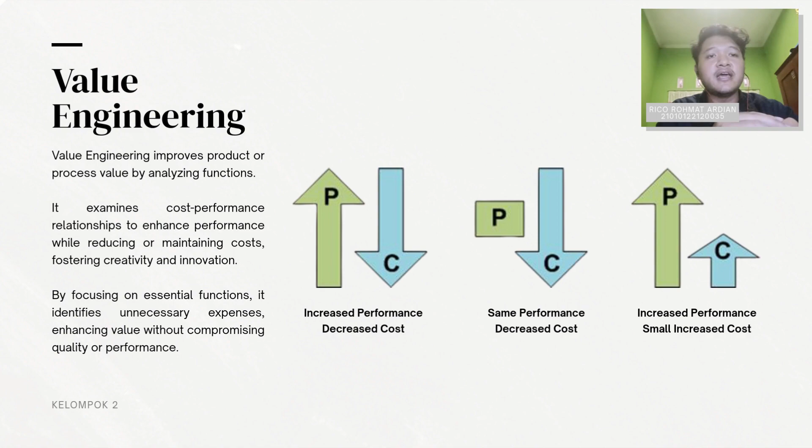Moving on, I will explain about the main stakeholder of the project. CREATE, or Chicago Region Environmental and Transportation Efficiency, is a public-private partnership program where the federal or state government is partnering with private companies in Chicago, focused on improving the region's rail infrastructure through a series of interrelated projects.

Its goal is to reduce traffic congestion, increase efficiency for both freight and passenger trains, and strengthen the national supply chain. The program involves 70 projects to separate rail lines, eliminate conflicts between railway and roadway, and increase speeds for both trains and vehicles.

As can be seen in the picture in the presentation, this is a short portfolio of the CREATE program. The CREATE program is investing in the Chicago region's rail network to add capacity for all transportation, reduce travel times for both trains and vehicles, and improve safety for both of them too. More than 70 projects across the Chicago region have been built or are still being constructed today.

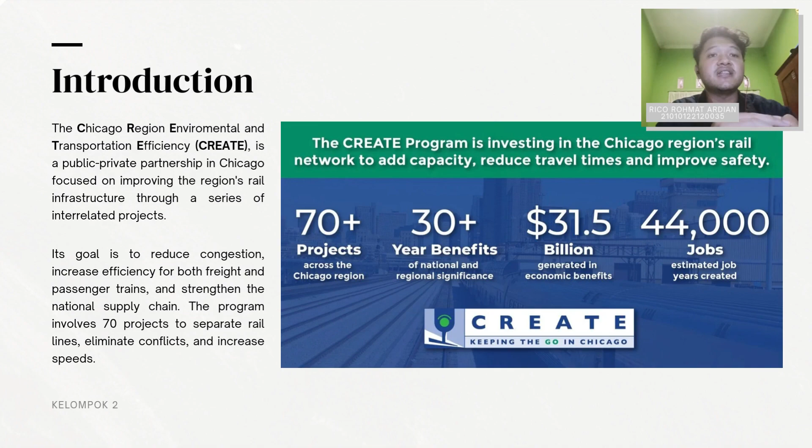Now I will explain the context of this project. In the presentation above, you can see 25th Avenue highlighted in red. That is a crucial 4-lane roadway with an existing average daily traffic, or ADT, of 19,000, projected to reach 20,000 by 2040. It serves as the municipal boundary and is under Bellwood's jurisdiction, providing vital access to Interstate I-290. The interstate is located in the far north of the map.

And the blue highlighted one is the Union Pacific Railroad, or UP, facility. That is a, apologies, rail tracks which cross 25th Avenue at grade, or in other words, at the same elevation. The Union Pacific Proviso Yard, or simply put, the train station, is located approximately 790 feet west of the crossing.

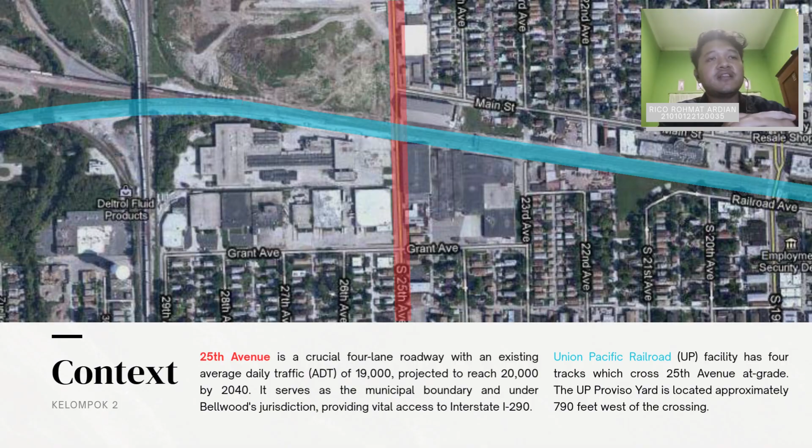Moving on, I will explain why and what the project aim is. The 25th Avenue and Union Pacific Grade Separation number 6 aims to create a grade separation that differentiates the elevation between 25th Avenue and the Union Pacific Railroad. This project is sponsored by Melrose Park, Bellwood, Maywood, and the federal government.

The need for the proposed improvement is to address operations and safety along 25th Avenue, the crossing safety between the roadway and railway, and reduce delays mostly caused by passing trains. The value engineering study occurred in the early phase when plans were approximately 30% complete. This means that the design team can change many things that can positively affect the project, and there are also many possibilities for collaboration between the stakeholders.

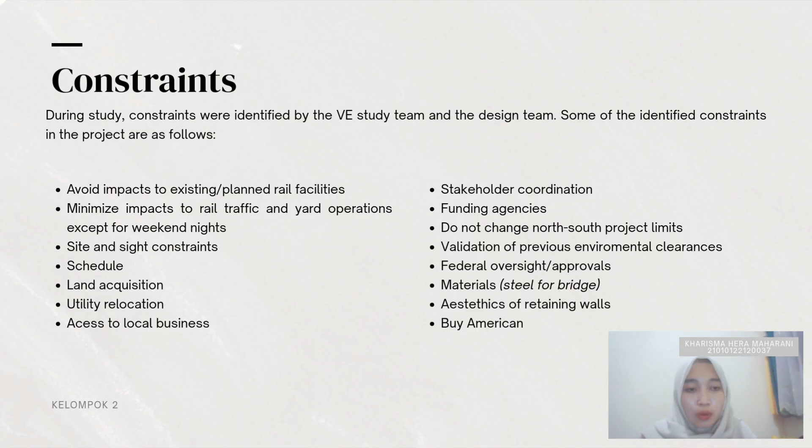There are also limitations related to the site condition, schedule, land acquisition, utility relocation, and access to local business. In addition, the project must consider coordination with stakeholders, requirements from the funding agency, and maintaining the established North-South project limits. Environmental document validation, federal approval, availability of materials such as steel, and the aesthetic of the retaining wall are also important considerations.

Each risk has a different level of impact and likelihood, so it is important to prepare strategies to manage them. By understanding risk early, the team can make better decisions and ensure the project stays on track.

And then project position. During the value engineering study conducted by the firm, users, owners, and stakeholders of the project are reviewed in accordance with the environmental document and contain a clear definition of each type. A user is defined as one who physically uses the project and maintains the project. An owner is defined as the one that is responsible for financing the project, managing the project, and representing their interests. And then a stakeholder is anyone who is financially affected by the project, a change in habits, or a change toward the environment.

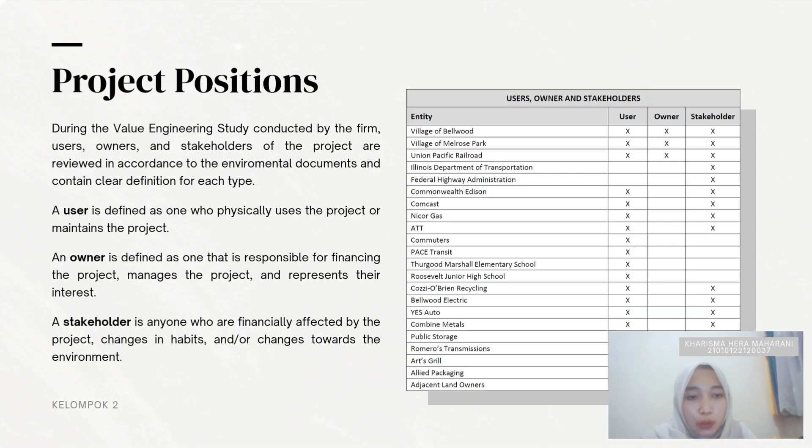In this slide, we discuss the project position, which categorizes the parties involved in the project as users, owners, and stakeholders. Users are the people who use or maintain the project, such as the public who will pass through the area. Owners are the parties responsible for funding and managing the project. Stakeholders are the parties affected financially or by the change in habits or the environment as a result of the project. The diagram in the slide shows who belongs to each category. By understanding each group's position, the team can adjust the design and decisions to meet everyone's needs.

And then needs and desire. During the study, the team identified the project expectations by dividing them into needs, or N, and desires, or D, on the project position. Needs is defined as the function that must be fulfilled by the project and imposed by the various users, owners, and stakeholders. Desire is defined as the function that is not necessary. However, it should be fulfilled if cost is not a factor or it does not violate constraints.

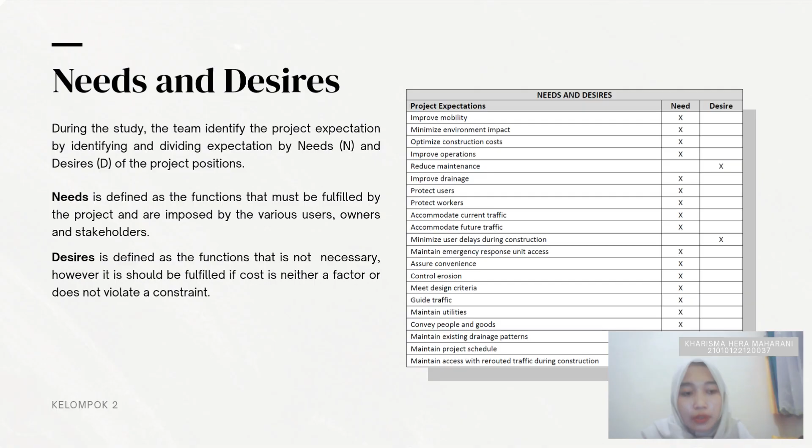In the needs and desires slide, the team separates project expectations into two categories, needs and desire. Needs are functions that must be fulfilled because they directly relate to users, owners, or stakeholders, for example, improved mobility, reduced environmental impact, and better safety. Desires, or D, are additional functions that are not required but would be beneficial if they can be included without violating constraints or adding significant costs. By making this distinction, the team can set clear priorities so the project remains efficient while still providing maximum added value.

Cost estimation and analysis. In the cost estimation and analysis process, construction components are sorted by cost and then the Pareto analysis is applied, where 80% of the cost savings could come from the top 20% of the cost items. The analysis result is shown in the following table. In this analysis, not only work items are included, but there are also issues and concerns that were identified during discussion. In the table shown, we can see the components that contribute the most to the total project cost. From here, we identify the most effective opportunities for cost savings.

The cost shown on the table, however, does not include estimates for municipal utility relocation, nor the potential cost for the accommodation of temporary and permanent relocation of private utilities. Further along the project, more accurate and detailed cost estimates can be made.

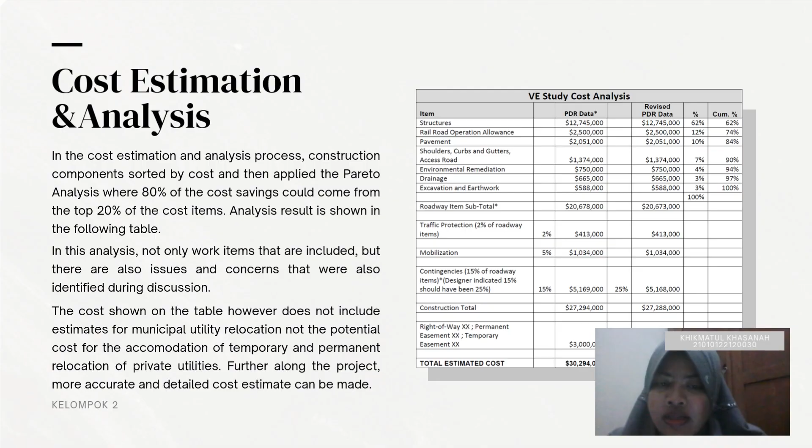Next, function analysis. The function analysis is conducted by the value engineering team to better understand and analyze the function of individual components within the project by asking these questions. What is it? What does it do? What does it cost? What else will do the job? What does that cost? These are the list of functions for each component and subcomponent as follows.

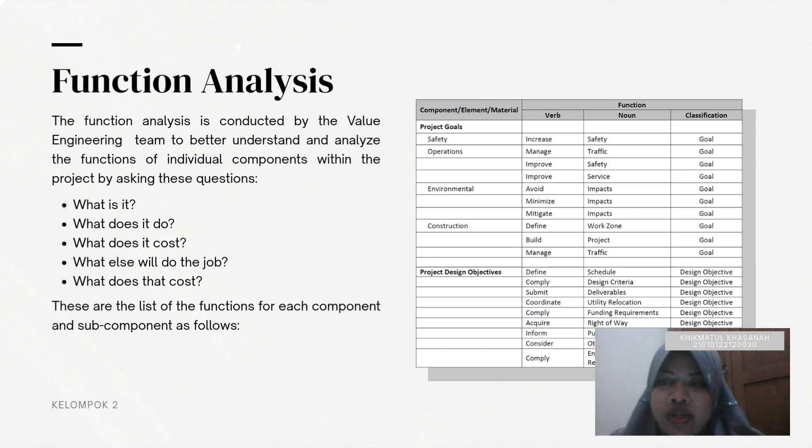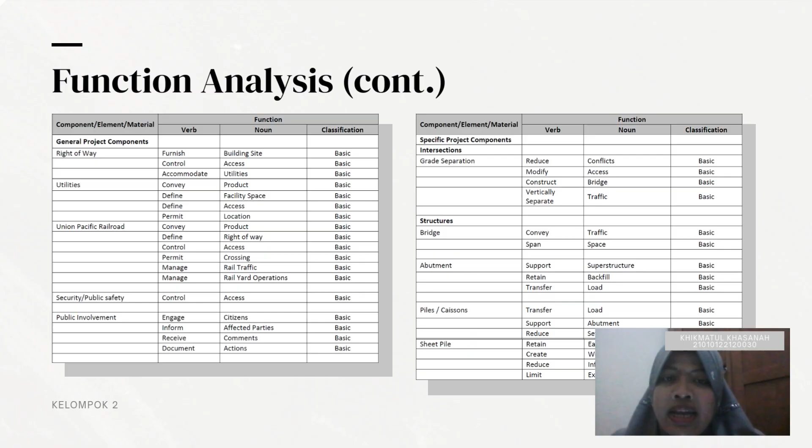With this approach, we can compare the output and costs of each component, then determine whether there are more efficient alternative solutions. Here is the table listing the function of various components and subcomponents. This table helps us understand the relationship between primary functions, supporting functions, and the components that perform them. Through this kind of function mapping, the team can more easily identify components whose costs may be disproportionately high compared to their functions, making them potential candidates for improvement ideas. And these two tables are a continuation of the previous table.

Idea generation. After the function analysis, the value engineering team created lists of ideas which would satisfy the function of the various project components. The main considerations in this process were opportunities for increased performance at a lower cost, followed by maintaining the same performance at a lower cost and increased performance with a small increase in cost. Ideas that have been generated during the discussion can be seen in the table.

At this stage, the value engineering team begins developing various alternative ideas that may enhance performance at a lower cost, maintain performance at a lower cost, or improve performance even with a slight increase in cost. The ideas generated in this stage are organized into a table for future analysis.

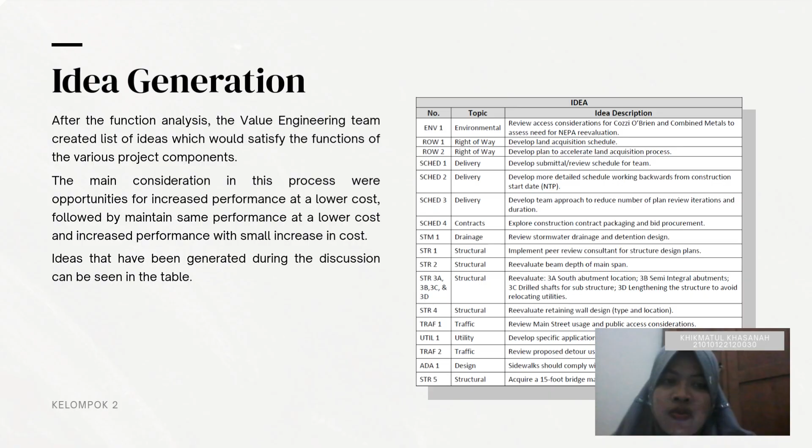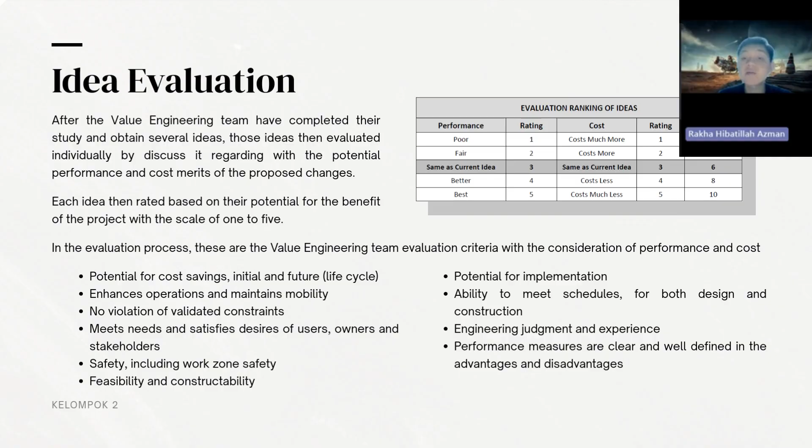Now, in this evaluation process, the team used several key criteria, which you can see at the bottom of the slide. These criteria consider both performance and cost. We focus first on the potential for cost savings, and whether the idea enhances operations and maintains mobility, and then last is feasibility and constructability.

Okay, we move on. You can see this idea evaluation, so the specific results of the evaluation process we just discussed. If you look at the table on the left, we have broken down ideas by category. First, ENV1, which is to review access considerations for a NEPA reevaluation. This scored a total of 7. Its main advantage is confirming compliance with federal procedure. Next, for the right of way, idea ROW 1 is to develop an acquisition schedule, and ROW 2 is to develop a plan to accelerate that process.

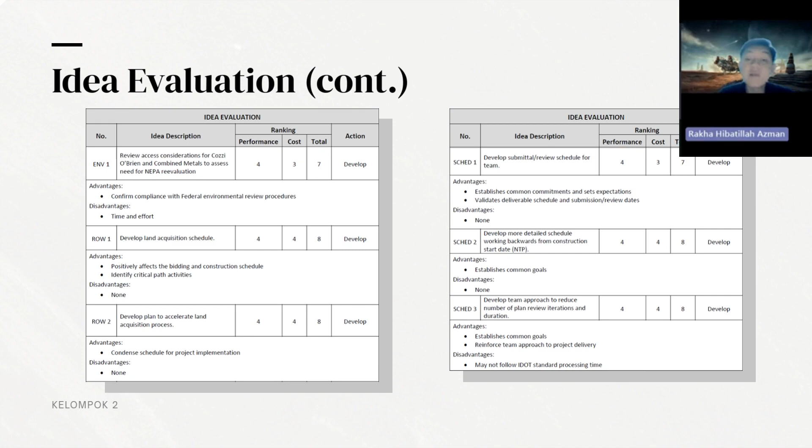Now looking at the table on the right, we have 3 ideas related to the schedule. SCHED 1 is to develop a submission and review schedule for the team. 2, develop a more detailed schedule by working backwards from the construction start date. And 3, develop a team approach to reduce the number of plan review iterations.

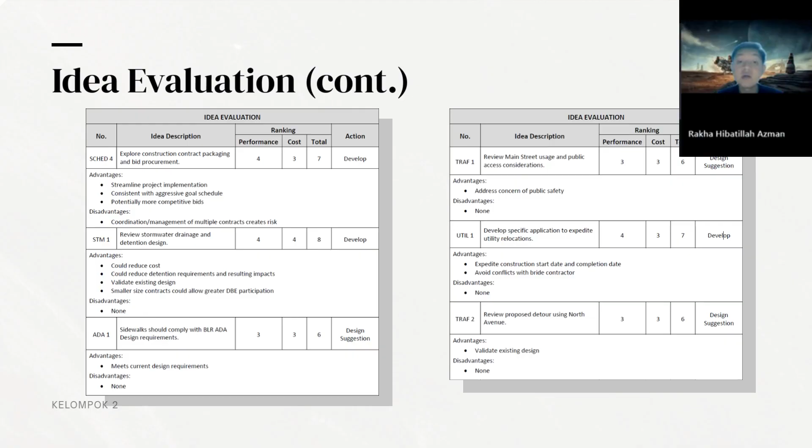We are still on idea evaluation, looking at more results. On the left-hand table, we see SCHED 4. This idea to explore construction contract packaging is scored 7 and is marked to develop. And STM1 is to review the stormwater drainage design; it scored a high 8. And ADA1, this is a compliance item ensuring sidewalks meet ADA requirements. It scored 6 and is noted as a design suggestion.

Now looking at the table on the right, which focuses on traffic and utilities. On the right, you can see TRAF 1, UTIL 1, and finally TRAF 2, review the proposed detour. This is another design suggestion to validate the existing plan.

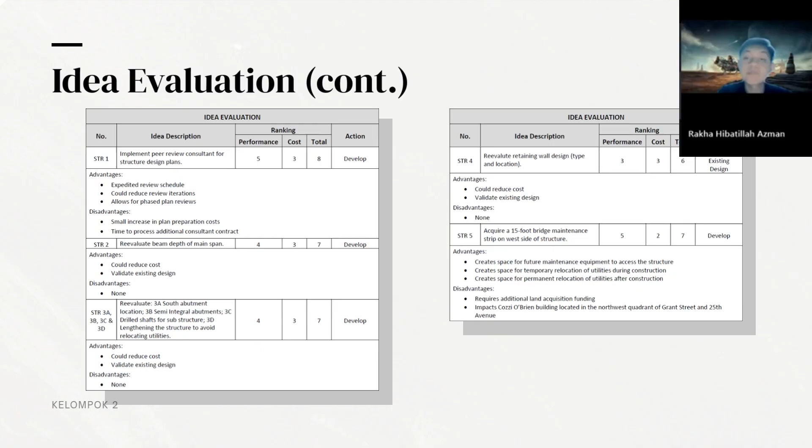Okay, next. Here we have the final slide for idea evaluation, focusing on the structure STR item. Let's look at the table on the left first. STR1, this is to implement a peer review consultant for the structure design plan. This idea is scored an 8 and is marked to develop. The advantages are a faster review schedule and allowing for phased plan review.

And second, this is a reevaluation of the beam depth of the main span, scored a 7, offering potential cost reduction, and will also be developed. STR3A, 3B, 3C, and 3D. This involves reevaluating several abutment and pier locations to avoid relocating utilities. This is also scored 7 and is set to develop.

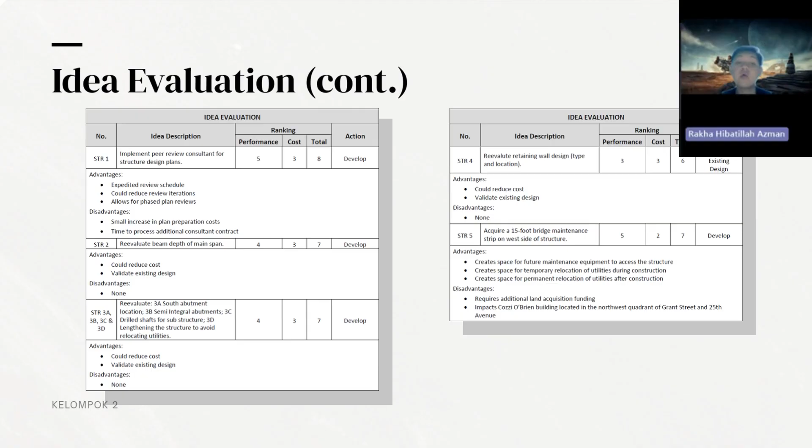Let's move to the table on the right. Number one is STR4. This idea is to reevaluate the retaining wall design, and STR5. This is to acquire a 15-foot maintenance strip on the west side of the structure. This is scored 7 and is marked to develop, while it has disadvantages like requiring additional funding.

The idea is to use a steel plate girder with a 40-inch deep web rather than a 48-inch deep web. The VE team's recommended action is to proceed with this change. The most important part is the change in cost. This action results in a significant cost saving of $186,000 as an advantage. This action reduces cost with the same performance. And with no disadvantages known, this is a clear win for the project.

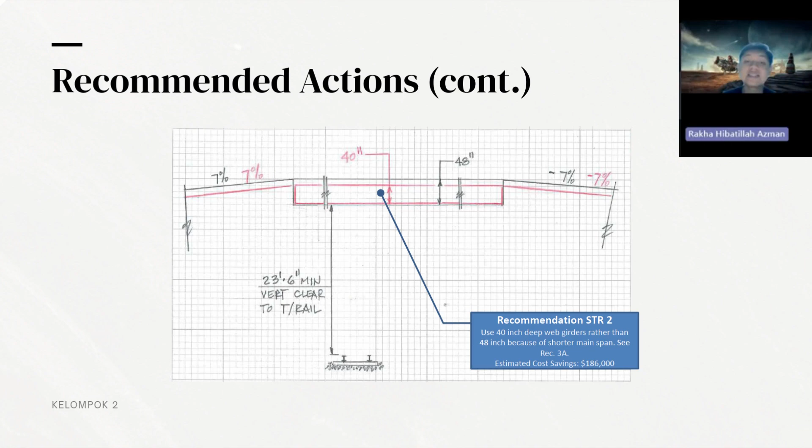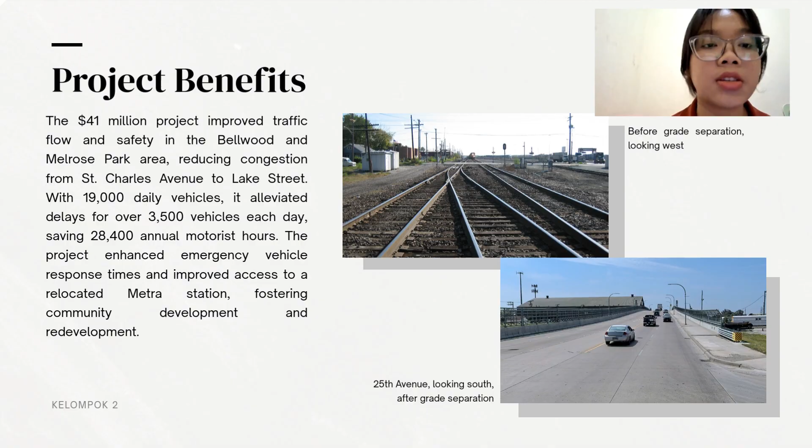The project enhanced emergency vehicle response time and improved access to a relocated Metra station, fostering community development and redevelopment. And in this slide, you can see the finished project.